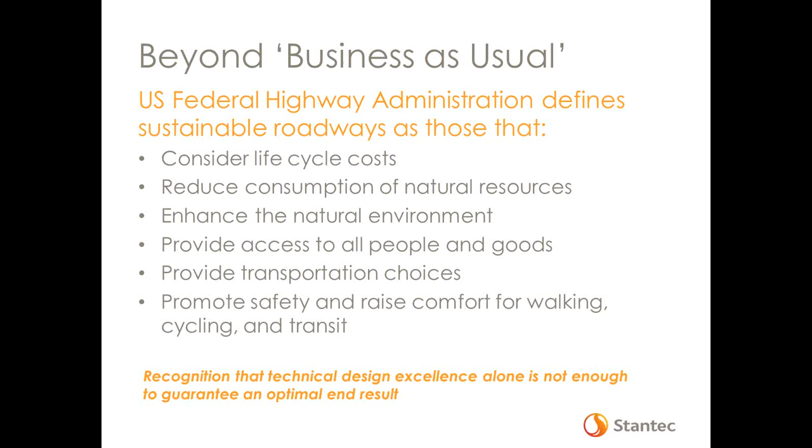So what does a sustainable roadway look like? It doesn't look significantly different than the roads we build today, it just has added features. We look at how we're doing pedestrian and bicycle access, incorporating the natural environment, incorporating art, and coming up with context-sensitive systems and designs that take into consideration all the elements associated with constructing new infrastructure. Part of this is bringing back native vegetation, dealing with drainage issues, and using those to the benefit of the infrastructure we're building.

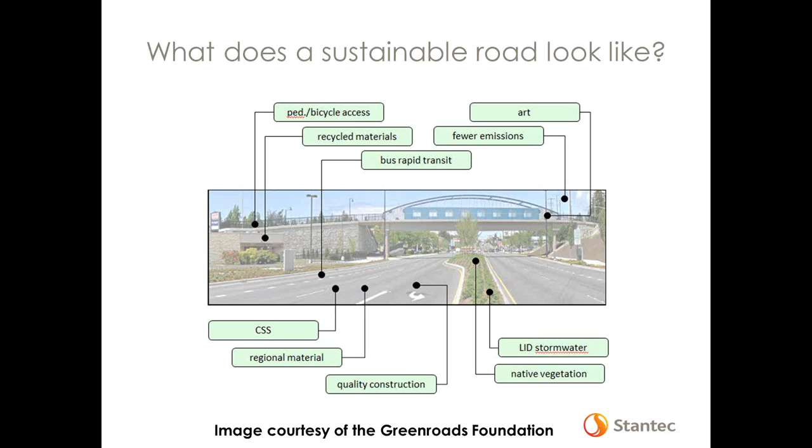I'm really enamored with the complete streets concept. I personally am a cyclist, I ride every day to work. It makes the people I work with think I'm crazy, because at 115 degrees it is pretty hot, but it's still doable. My ride is about 8 miles, and I try to stay off what I'd consider the major arterial network, because in Phoenix the speed limit on the network I'd have to ride on is 45 miles an hour, and there's a section with no bike lanes.

Now, I'm the type of cyclist who will ride on a 45-mile-an-hour road with no bike lanes so I can get to work, but not everybody else can accommodate that type of infrastructure. Complete Streets really takes the focus back to what's the purpose of the entire roadway. It's not necessarily about getting cars or people there the fastest way, but about accommodating everybody who needs to use the physical roadway right of way. As a city engineer, I was absolutely responsible for what went on in the public right of way.

Part of the opportunity was that we had a significant number of standards, both for the development community and for the city when we built roadways. In even residential neighborhoods, we had developers asking if they could remove the sidewalk on one side or do something to eliminate costs associated with construction. That was contrary to the concept of managing people's opportunities to use other modes of travel, even in local neighborhoods.

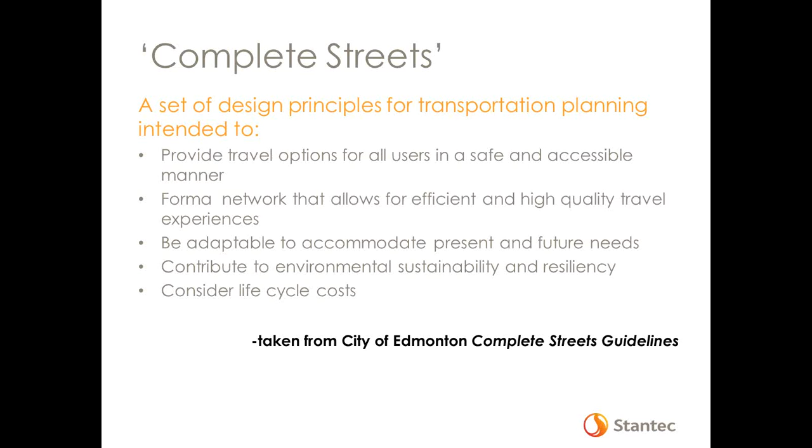I'm going to talk about two different things. I've got this concept of Complete Streets and what we did—this is just a sample from Greenroads of what a complete street looks like. We had a street in Chandler, where I was city engineer, and we were trying to take the scale of the street down from a 6-lane arterial to infrastructure going through the downtown.

The standard speed on the roadway when we started the project was in excess of 45 miles an hour—that's what the traffic was like going through downtown. We were trying to pre-position infrastructure to allow future development and redevelopment downtown to improve the walking environment. We had a pedestrian crossing we called the chicken crossing, because you were playing chicken with traffic, coming at you at 45 miles an hour, just to get across the road.

We took most of the travel lanes down in width, and we eliminated a lot of the separate right turn lanes and separate left turn lanes, making people stay within the traffic stream.

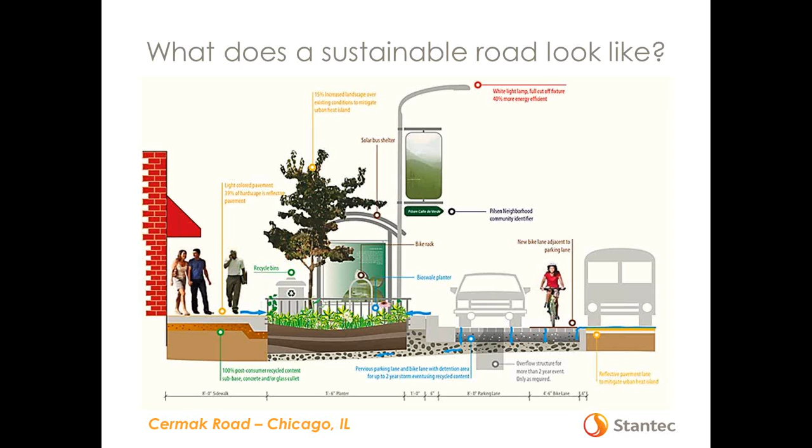So when we started all of this in Chandler, we didn't really have a guideline to do this with. A lot of these standards were just coming into play at the time—it was about 2008, 2009 that we started this type of project.

So when we were looking for guidance or guidelines that could allow us to make the types of changes we were looking at, we were running up against every group who had a technical stake in the project, each wanting their stuff to be the most important. It always typically deals with who has the money when you start these projects—it's the streets guys, and they have the money. So the park guys don't get their trees, because the street guys are too busy paving and making things look the way they want.

It was a really big effort, and we were really taken through by the mayor at the time and our downtown redevelopment manager, who were the cheerleaders for making a change, to not build the same thing that we have always built when we were building roadways. It was a very interesting approach to getting people to see that there was a different way of doing things.

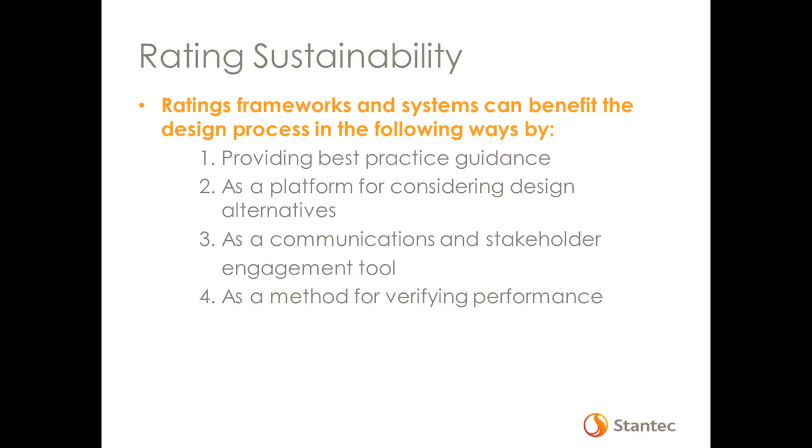When we talk about rating and sustainability systems, there's a bunch of new tools out there being used in a variety of states. I've set this presentation up so you'll see things from north of the border. The example project I'm going to show is from Canada. I am originally Canadian and have been working down here in the US for almost 15 years, so I've learned to process things the right way, except now I can't remember which one I'm supposed to use where.

When we talk about sustainability and rating tools, there are a number of these types of opportunities out here for the technical design side. But really what it's missing is the ability to take in the next level of community stakeholders, the environmental components, and making sure those are dealt with as you're looking at the overall construction.

Envision really came about as a group effort and brought together both the concept of sustainability as well as life cycle, and a number of other elements in which you can rank a project and get a level associated with the way your project's done, much like the LEED rating system.

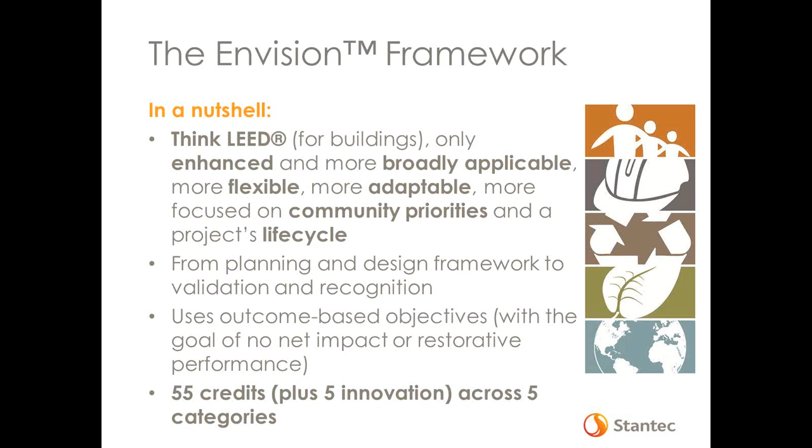There is a website for Envision, so if you'd like to go to that, but this just gives you kind of a basic overview. It looks at really the full project life cycle, not just what we're trying to build today. It looks at some of those long-term maintenance issues and material choices that impact that.

And then, by incorporating the stakeholder input, it brings together a whole group of people that sometimes, if you looked at a standard project, unless you're working in a smaller city where your engineering department does all the engineering for everybody, you wouldn't have that opportunity as easily. But as cities get larger and you get into individual departments, everybody has their own specific need, and it really depends on who brings the money to the table.

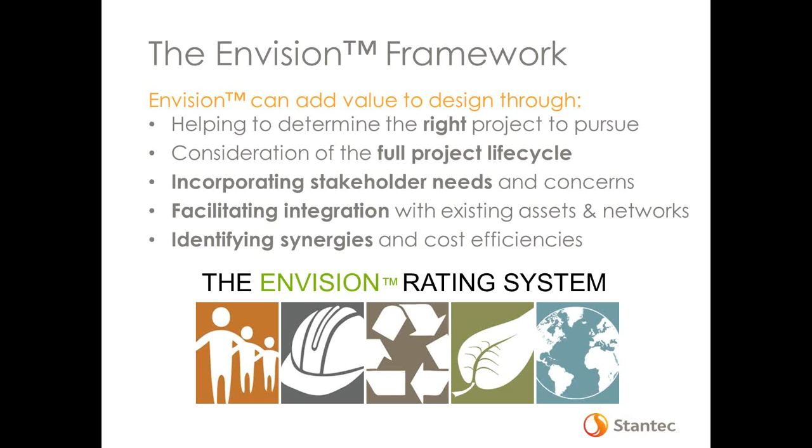The interesting thing that makes it significantly different from the LEED part is that the infrastructure we're talking about has a variety of different stakeholders, both private and public, typically when you're working in the right of way, and you're looking at agencies, utility companies, everybody that may not have a shared vision for what you're trying to do. And there is a lot of taxpayer funding that is predominant in this approach.

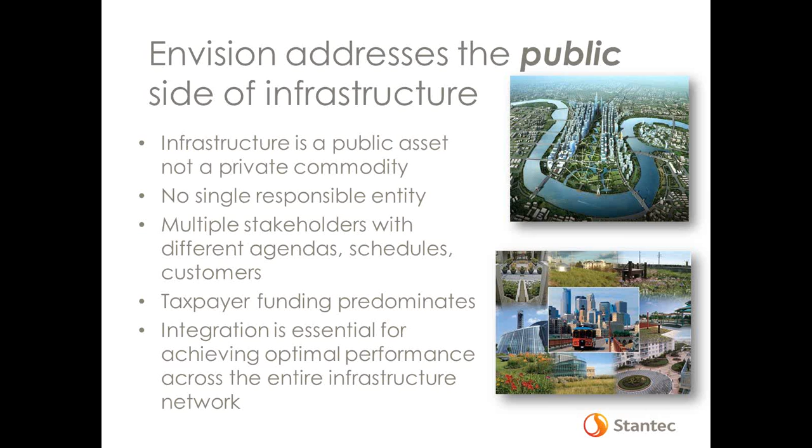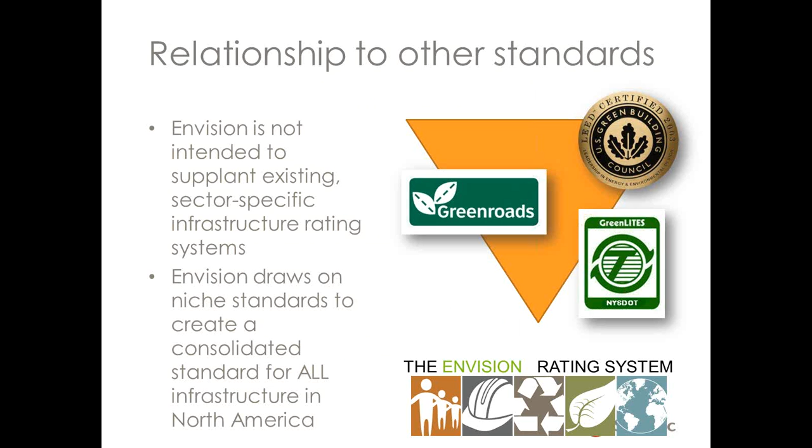There are other standards, and we're not superseding those. We're really taking those and incorporating them and adding these other elements to the entire process. And I'm going to show you a practical example.

Once again, this is north of the border, but it also takes you from the concept of, we're not just talking about roads when we talk about infrastructure and transportation. So it's a multimodal approach.

Here, our Stantec team was looking at an area where the city wanted to incorporate more bicycle activity, which if you looked at this, you can't quite figure out where you'd put a bicycle. They wanted to incorporate a lot of residential neighborhoods in this same area, and they wanted to be able to protect some very environmentally sensitive bald eagles.

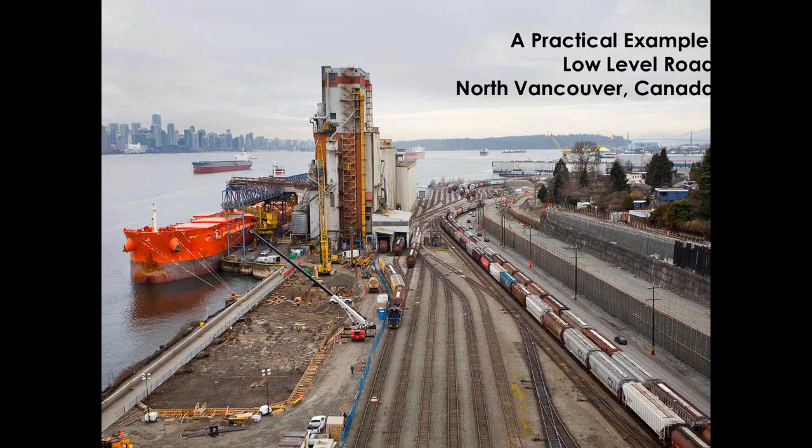So when you looked at what they were trying to do here, they had such a significant increase in the amount of rail traffic that needed to get to the port. They needed to remove some of the at-grade crossings for the roadway. And they wanted to be able to do this in what was a very confined area.

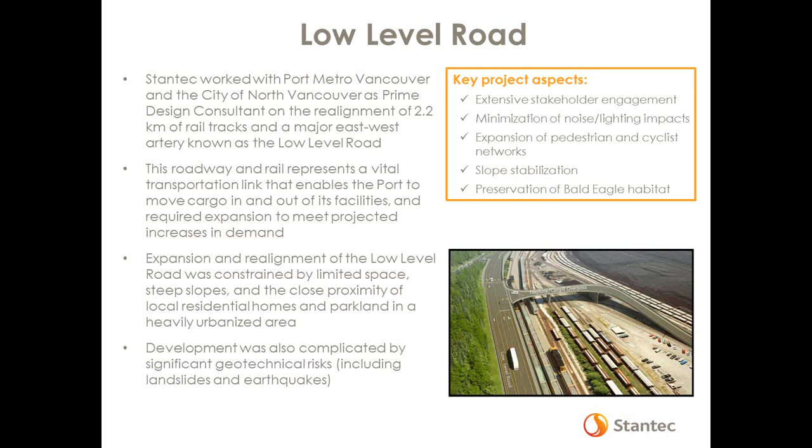So they did a ton of public outreach. They had private residential that was right next door. They wanted to deal with the bald eagles that were already nesting on the site. They had an opportunity to link a whole bunch of other infrastructure together that would never have been able to be linked previously because of the railroad itself. And so this was what they were looking at.

And then just to add complexity to everything, they added earthquakes. So, if you're wondering what you have to design for, then you have the potential of the geotechnical aspects of a project.

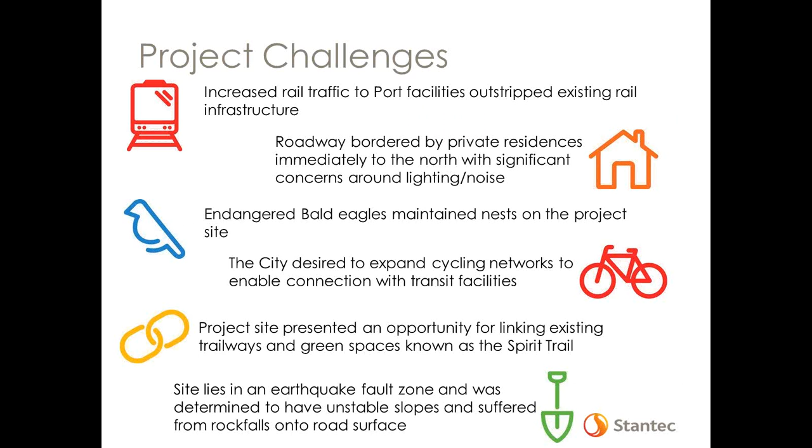What we were able to do, we were able to get rid of those at-grade crossings. We were able to mitigate a lot of the environmental issues, and we were able to take a lot of the invasive species off of the project site and get back to native plants for the area.

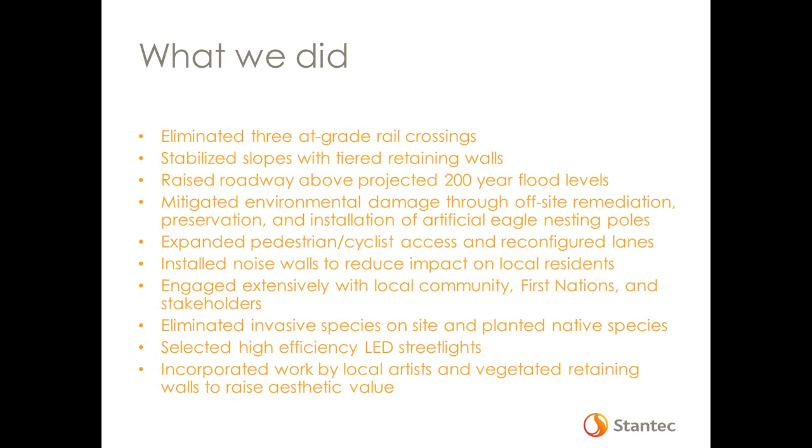And there was a good opportunity to incorporate art into the project as well, to make it an aesthetic place that you wanted to be at. When you looked at that previous picture, it wasn't that aesthetically pleasing. So really what happened was there were noise walls added. The park itself was then linked back to the roadway network, and there was a lot of public art incorporated.

Some unique transportation options, which incorporated a diverging diamond intersection. So as a project in its totality, it brought a lot of the elements together to show what can be done when you're dealing with very complicated multi-stakeholder type projects.

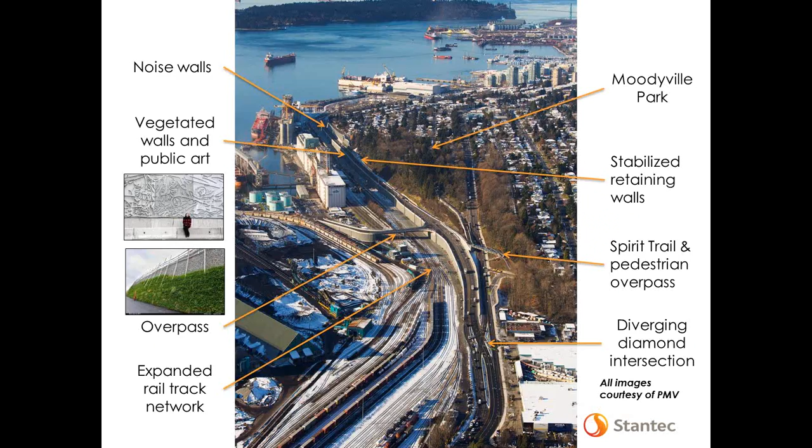So I've given you kind of an overview of what Envision can do. It is an opportunity to engage your public officials. It gives them an opportunity to see a holistic approach where you bring multiple groups of stakeholders together and address the overall concerns for a project, and give you the opportunity to see what that looks like in terms of a delivered, constructed project that will bring you the opportunity to deal with that multimodal integration. So that's my presentation.